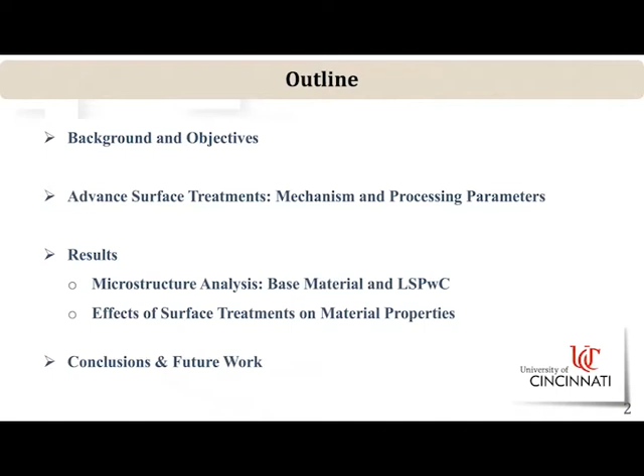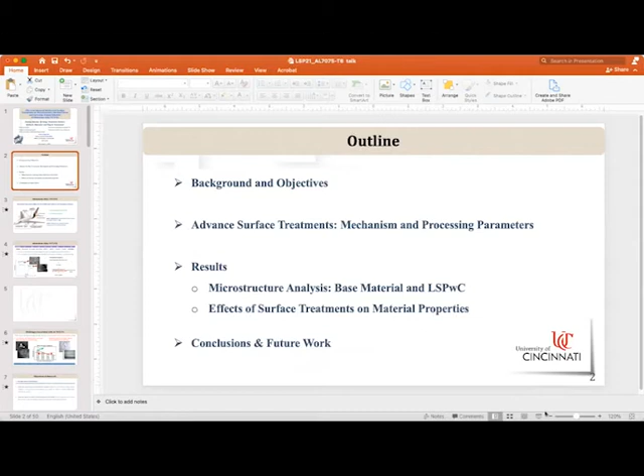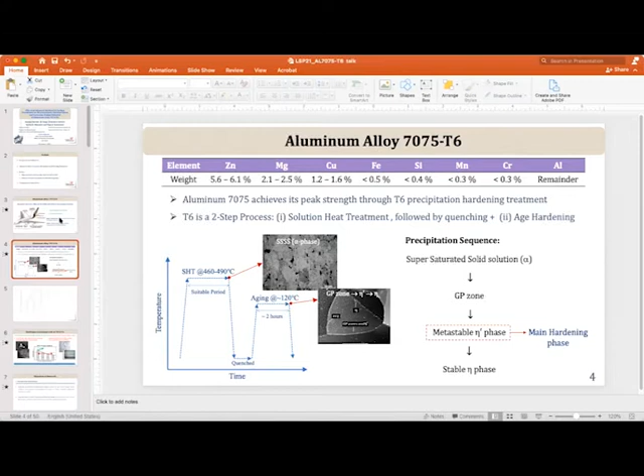Okay, so 7075-T6 is a high-strength aluminum alloy, right? And this is the basic composition of the alloy. VJ, we're only seeing a sliver of your presentation. I think if you just leave it in edit mode and present it, that'll work fine for now. Oh, there it is. Okay.

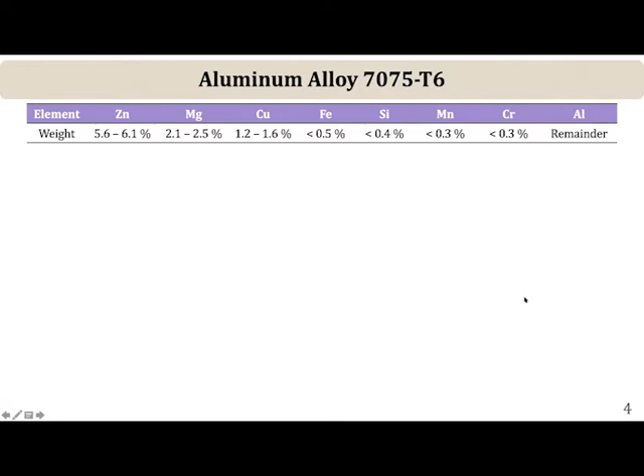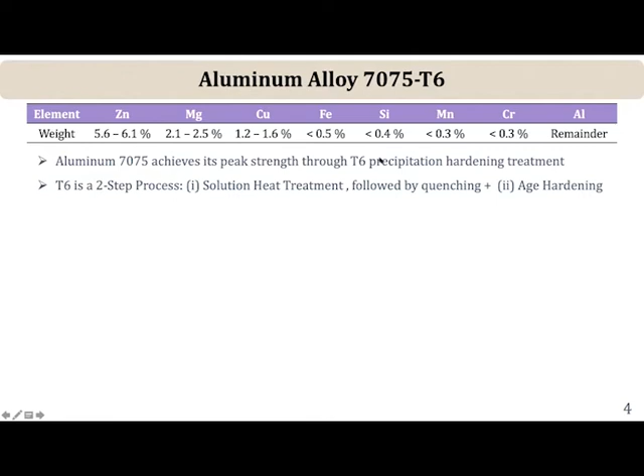Okay, so basically it's an aluminum zinc magnesium alloy with about 5.5 to 6% zinc, 2% or so magnesium and copper. These are the main strengthening agents or alloying elements. And it achieves its high strength through the T6 treatment, which is a peak-aged condition. So basically the alloy is solution treated, typically around 460 to 490 degrees, it's quenched and then aged at 120 degrees C.

So basically this alloy derives its strength through precipitation. The precipitation proceeds in steps. It involves initially a supersaturated solid solution. You get GP zones, which are almost pure zinc. That's followed by formation of eta prime, which is a metastable precipitate, and then the equilibrium stable eta phase. The eta prime is the primary strengthening precipitate.

However, most aluminum alloys, apart from these very fine precipitates that you get, also have these large intermetallics, typically copper-rich aluminum, copper iron-rich particles. And those are a huge problem in aluminum alloys, not just from the standpoint of limiting fatigue life, but also in terms of corrosion resistance, because there is galvanic coupling relative to the aluminum matrix. So these tend to be somewhat nobler, and the areas around these precipitates typically tend to get attacked.

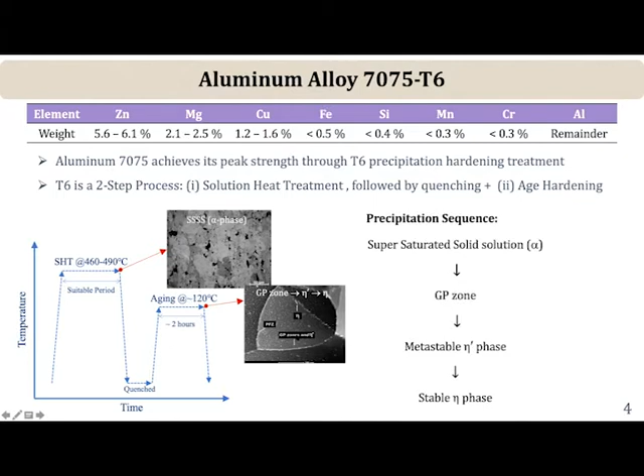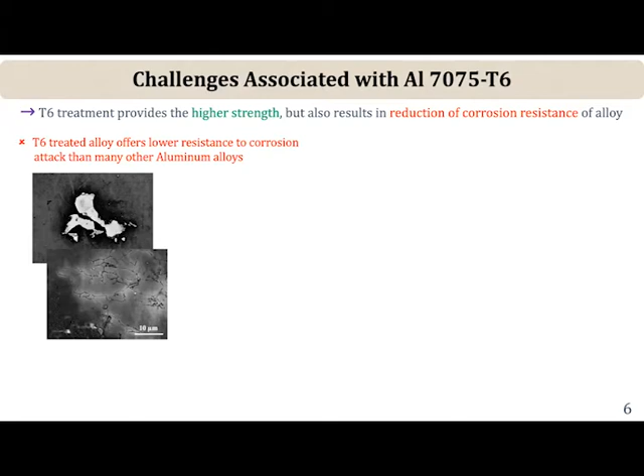And that's where pitting typically initiates. And then once the pit forms, it's a local area where fatigue cracks can initiate. So this SEM micrograph here shows a typical microstructure. But as I mentioned, one of the main challenges is that the T6 treatment, although it provides higher strength because it's a peak age condition, it also reduces the corrosion resistance appreciably, compared with many other aluminum alloys.

In fact, corrosion and stress corrosion cracking and exfoliation are problems in aluminum alloys. One of the earliest speakers talked about marine aluminum alloys, where there's a similar problem in terms of precipitation of the beta phase along grain boundaries, which leads to depletion of magnesium around the grain boundaries and gives localized cracking and exfoliation, where entire grains fall off. So this is a problem not just in the 7000 series, but in a number of aluminum alloys as well.

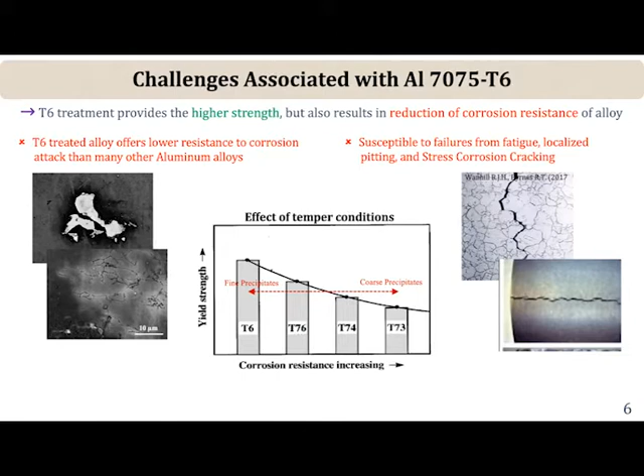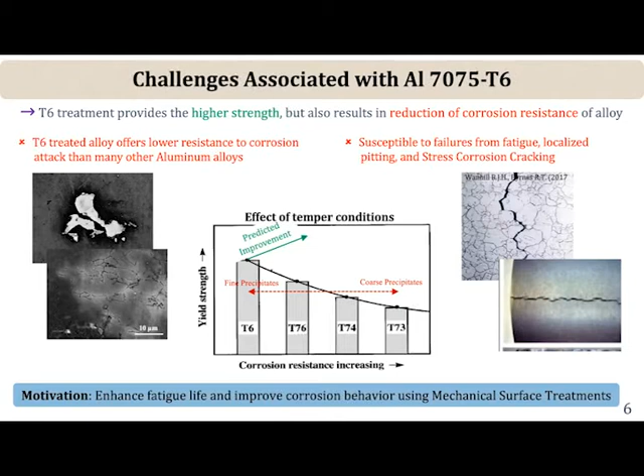So the question is, if I want to use the alloy in a high strength condition, is there a way to simultaneously achieve protection against corrosion and stress corrosion cracking? So the goal here really is to look at what impact mechanical surface treatments could have on improving the corrosion and stress corrosion cracking resistance of high strength aluminum alloys. So basically, Anurag did this in 2 stages.

He first looked into detail at how laser peening and the other technique of ultrasonic nanocrystal surface modification, what kind of microstructural changes they bring about, and in turn what impact that has on properties, and whether one can achieve some kind of a mechanistic understanding of not just the impact of compressive residual stresses, but more importantly, as the earlier speaker alluded to, these surface treatments are not just about introducing compressive residual stresses, because there are significant near surface microstructural changes and gradient microstructures produced, which are less understood and also have a huge impact on the fatigue life.

And this is something that, as the previous speaker mentioned, there needs to be a program to really look at how we can take credit for that, especially in life prediction kind of modeling. But anyway, that's another subject altogether.

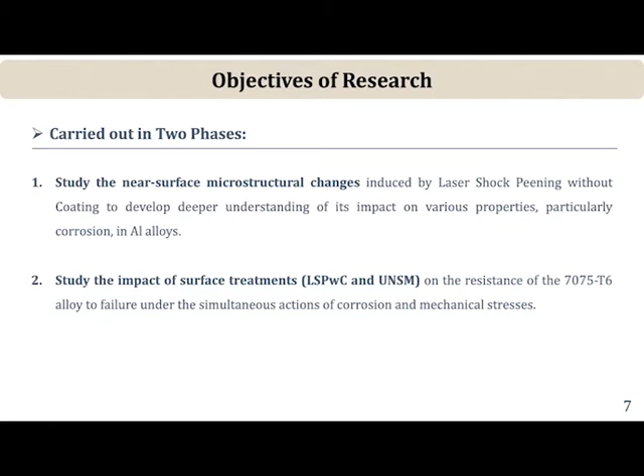So one is to understand the microstructural changes, and the second is to look at what impact these treatments have on the corrosion behavior and on the mechanical properties.

So basically, the materials were supplied by Airbus. These were thick plates, and as you know, the properties of these plates can be quite anisotropic. You have an elongated or partially recrystallized kind of grain structure, so it depends very much on whether the short transverse direction, typically the weakest direction and most prone to fatigue cracking.

So we have to take care when you do these sort of treatments and when you do the testing, that you test the material under conditions which are going to be the worst in terms of loading relative to the microstructural features. So two techniques.

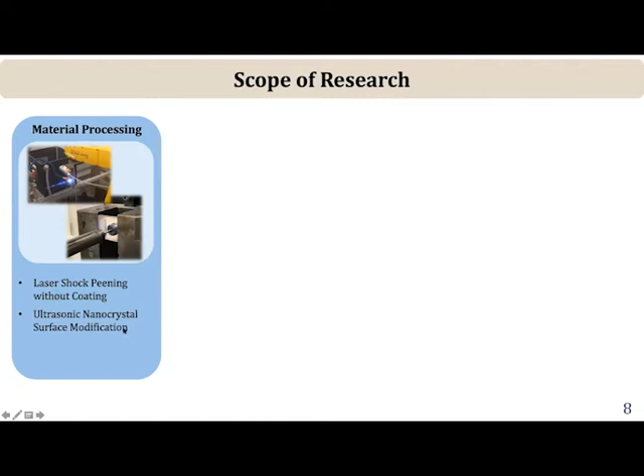One is laser shock peening without coating. Although Anurag has also looked at the effect of LSP with the ablative tape and then compared it with without coating. And then the UNSM, ultrasonic nanocrystal surface modification technique.

Characterization of microstructure and residual stress using a host of techniques, typically scanning electron microscopy, energy dispersive spectroscopy, electron backscatter diffraction. And then also to look at the near surface microstructural changes, you use focused ion beam methods to extract thin foils from the near surface regions, so that we can understand those features, microstructural changes, in much more detail. Residual stresses measured by X-ray diffraction, characterizing surface roughness, grain morphology, and then fractography as well.

The mechanical property tests, both using hardness, nano indentation tests, principally 3-point bend tests for the mechanical property, as well as the corrosion fatigue test, fatigue as well as corrosion fatigue.

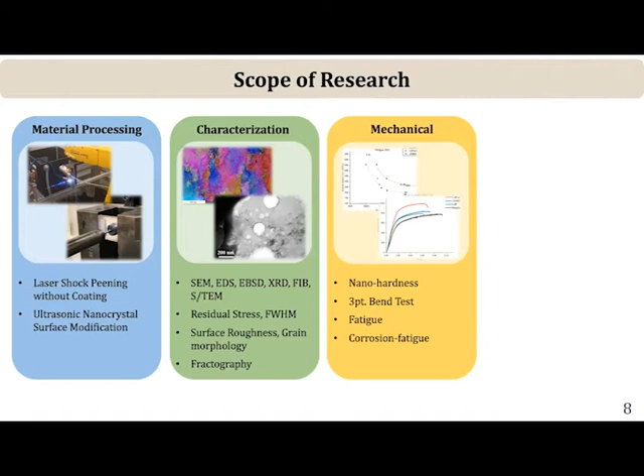And because, when you're dealing with surface treated materials, 3-point bend or 4-point bend tests are generally more suitable, because you're able to orient the sample in such a way that you can really test the effect of the mechanical surface treatments.

And then corrosion behavior is principally studied using electrochemical impedance spectroscopy, as well as potentiodynamic cyclic polarization.

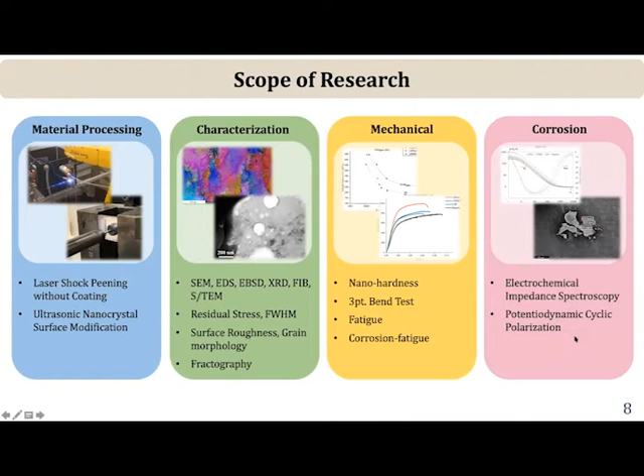Okay, so we have, in the Ohio Center for Laser Shock Processing in my former institution, UC, two systems. One is a Generation 4 system. These were built by Continuum, and they were kind of custom built, patterned along the systems that GE Aviation has in Cincinnati. And in fact, we got a lot of help in building these systems from GE. So this is a 7-joule system in each leg.

It's infrared, and at the frequency of 10 hertz, and the pulse width is around 20 nanoseconds or so. And with a robot system and a cell for the water and all the safety measures and so on.

Besides that, we also had a continuum DLS system, a 3-joule system in the infrared mode, and also the green. So this also had a green laser, so you can actually do some underwater peening. We've done those kinds of studies as well, and actually that has a very remarkable effect, especially when you do the laser peening without using any ablative tape.

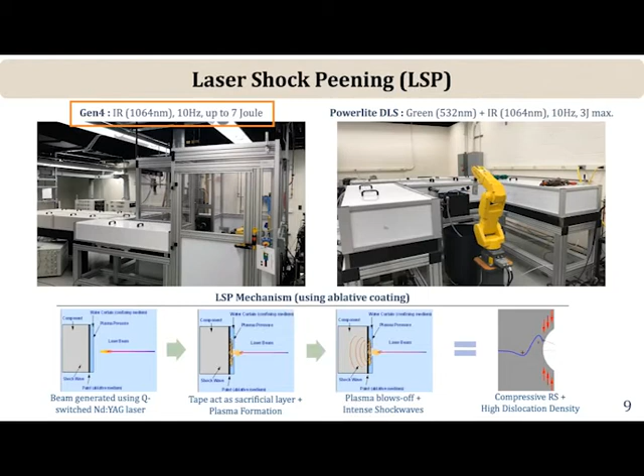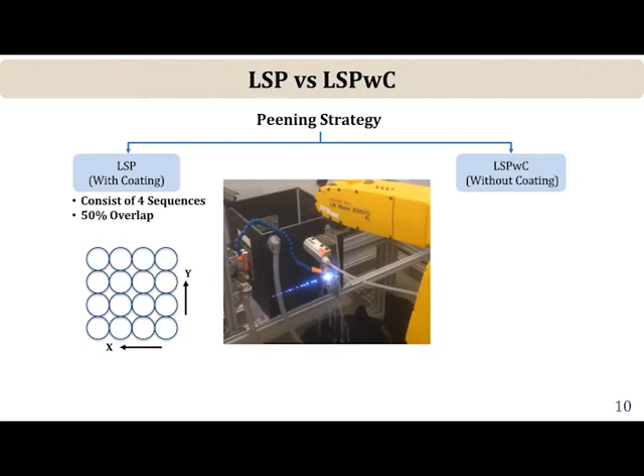So comparing the two, when you do this without a coating - Anurag has done this with and without the coating - so if to create a patch like this you have to use 4 overlap sequences, sometimes many more, depending on the degree of overlap, each time we've got to change the tape, right? And this is the net effect that you get from laser peening with the tape.

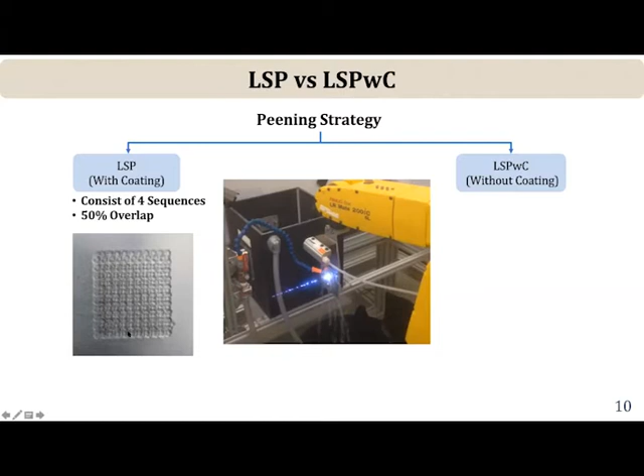When you do this without the coating, on the other hand - when you use the coating, you don't have any surface melting, it's a purely mechanical effect, and you get fairly high compressive residual stresses, and the degree of surface roughening is also low. But when you do this without a coating, basically no sequencing is required. But in the case of these aluminum alloys, you can see that the surface appearance is completely changed, right?

And as I mentioned, you can do this under flowing water or underwater, okay? And when you do this without a tape, you get surface melting and rapid solidification. The surface residual stresses can often be tensile, or slightly compressive, depending on how many spots, number of impacts you've put per unit area. But you can see that something has happened, where presumably you've got some kind of an aluminum oxide layer that has formed.

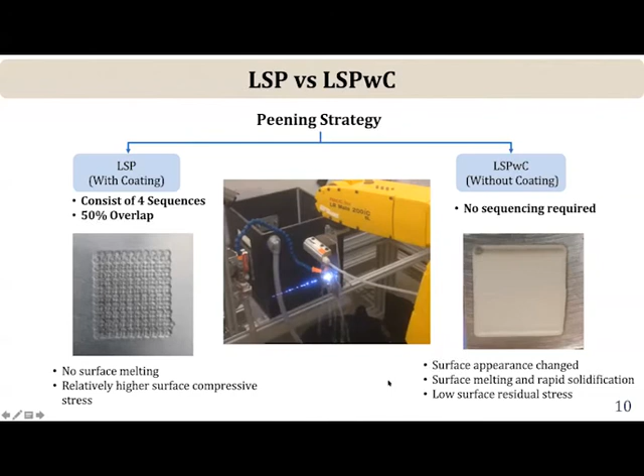So what Anurag did, with regard to this LSP without the coating, which was coined as LSPwC, following the original work of Yuji Sano, who's going to be speaking later, shows the methodology he used for doing this peening without the coating. But prior to selecting what kind of conditions to use for more detailed study, Anurag initially looked at the impact of pulse density - basically changing the degree of overlap and the number of hits per unit area - to set up some initial conditions for further study.

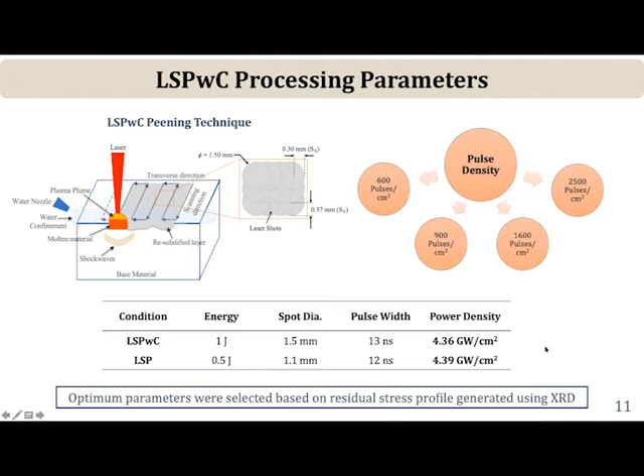So this shows the conditions. Energy is pretty low, the spot sizes are controlled here for these two. So the LSP here is with tape, LSPwC is without the coating, to get approximately the same kind of power density. These were arrived at based on measurements of the residual stress using X-ray diffraction. For this, we used the sine squared psi method with a proto-LXRD system, basically using a chromium tube.

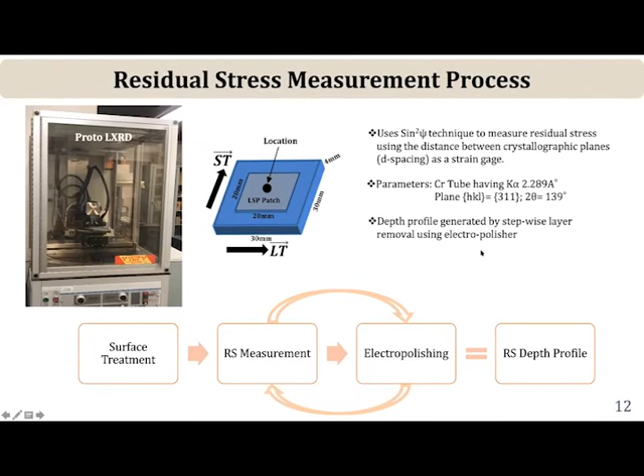The diffraction plane shown here is 311. To get the residual stresses to the depth, we use electropolishing, remove layers, do the measurement, and then account for the stress relaxation and stress gradient due to layer removal, which is taken into account in the software itself. This shows, essentially when you do the laser peening without coating, along two directions - the short transverse direction and along the LT direction, two orthogonal directions. You can see that the baseline material is slightly compressive on the surface, but relatively low residual stresses.

One important thing, as I mentioned, is initially Anurag looked at the impact of pulse density, and you see here the surface stress as a function of pulse density is shown. What he found was that at about 900 pulses per square centimeter, you get some optimal levels of compressive residual stresses in both directions. So essentially for subsequent studies, he chose this 900 pulses.

The important point to realize here is that this shows the residual stress versus depth as a function of distance, as well as variations in the pulse density.

In general, when you do this without a coating, the surface compression can actually in some cases be tensile. You can see here it is tensile in one direction. But just below the surface, there's a rapid increase in the compressive residual stress. Get about 10-20 microns below the surface, and you have fairly high magnitude of compressive residual stresses, to the tune of about -400 in one direction, about -300 in the other. The depth of compression also goes to about 1 millimeter or so.

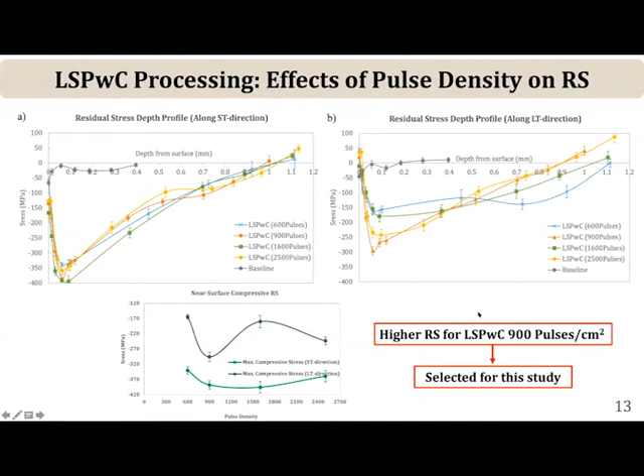Based on this study, he chose 900 pulses for processing all the remaining samples.

The other technique is basically ultrasonic nanocrystal surface modification. The difference is that this is really a technique for severe plastic deformation of the surface. It uses a tungsten carbide ball, and you impact the surface at very high frequency, on the order of 20,000 to about 40,000 times per second, with the tungsten carbide tool driven ultrasonically. Basically what happens is similar to shot peening and even low plasticity burnishing, I would say. It's really a variation of that technique.

The difference is in low plasticity burnishing, you keep the tool pressed and move it along the surface very slowly. Here, you not only have a static force, but also a dynamic force whose amplitude can be controlled. So the main variables in this process are the amplitude, meaning the depth to which you hit it, the feed rate at which the tool traverses, and the static load.

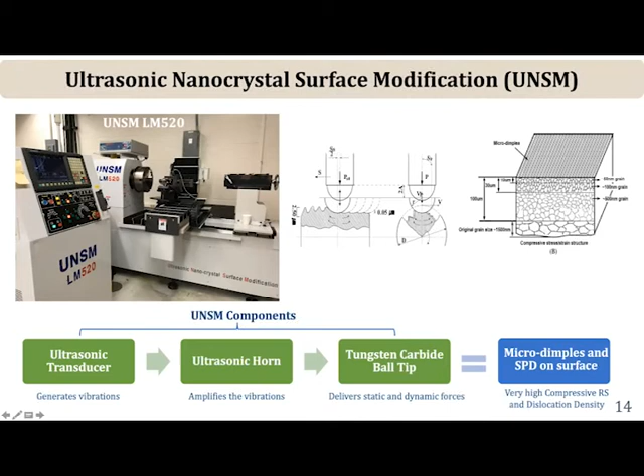So the machine itself is relatively simple. This is the one at UC. You can even do cylindrical parts. You place your sample or coupons here, and essentially what you do is hit it on the surface and create a patch. You can vary the speed at which you move the tool, vary the amplitude, as well as vary the pitch or the distance between the hits.

You can see he chose three different conditions for looking at the effect of UNSM. One is the static load, a constant load over and above the dynamic load. The amplitude, in terms of how much you're moving the tungsten carbide tool, the feed rate at which you move the tool, and the spacing interval between the hits. This gives you some idea about how many hits are there per square millimeter.

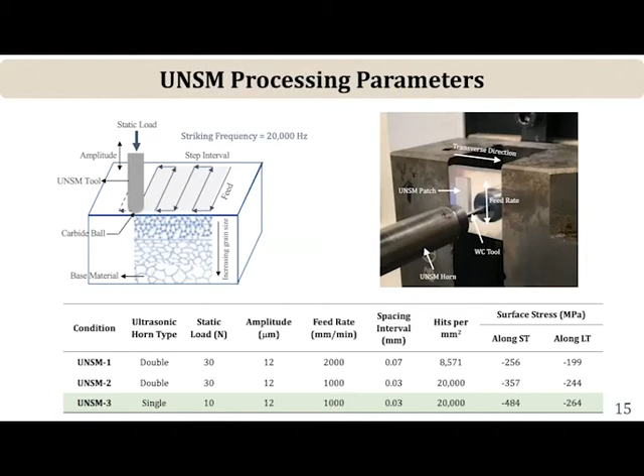And then the surface stress measurements are shown here. So one of the things with this technique is that just like in laser peening, wherever you're hitting, you're plastically deforming, and the surrounding material wants to constrain that deformation, so you get compressive residual stresses. But the other important thing is, since it's a severe surface plastic deformation technique, you get surface nanocrystallization. Essentially, the grains get broken up into subgrains or crystallites with high levels of misorientation and very high dislocation density, which also contributes to substantial hardening.

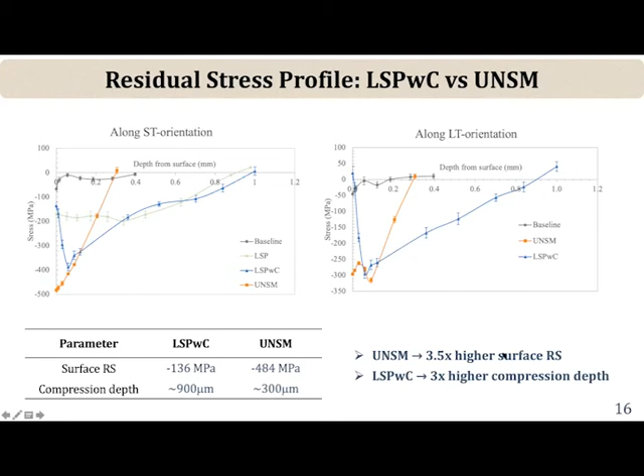Regardless, you can see that UNSM can lead to much higher surface compressive residual stresses, but the depth of compression is somewhat lower than the case of laser peening.

The other important quantity is that compressive residual stress is only one part of the problem. The other is the change in microstructure, the increase in dislocation density, and the formation of crystallites. Both LSP and UNSM can be regarded as ultra high strain rate deformation - it's plastic deformation. So the dislocation density is going to increase, and you're going to form subgrains and crystallites which are highly misoriented.

The consequence of having crystallites and high dislocation density is that you get broadening of the diffraction peaks. The extent of broadening can be used as a measure of the level of plastic strain at the surface, as well as a measure of crystallite size. So what you notice here is the full width half max of the diffraction peak as a function of depth.

What you see here is that in the case of UNSM, when you blow this up, the dislocation density is much higher compared with laser shock peening. The crystallite sizes are also much finer - you can get almost 20, 30, 40 nanometer size crystallites at the surface, and that gives you a much greater extent of broadening compared with the case of LSP.

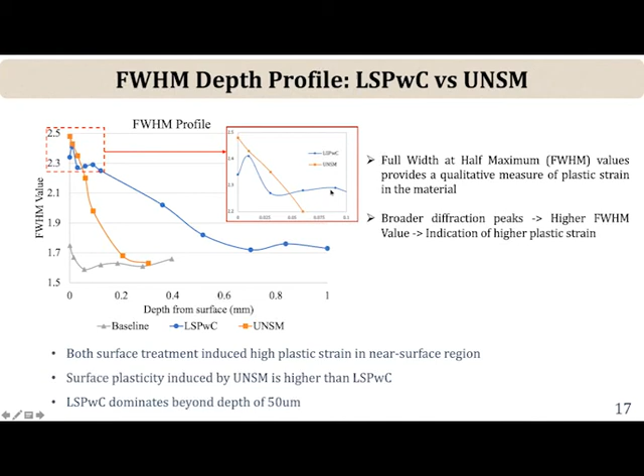Interestingly, even with LSP with coating, you do have a fair amount of broadening at the surface. At the surface it's a little lower, but the dislocation density just beneath the surface is actually quite high. Beyond about 50 microns or so, there's much more plastic strain with LSP compared with UNSM.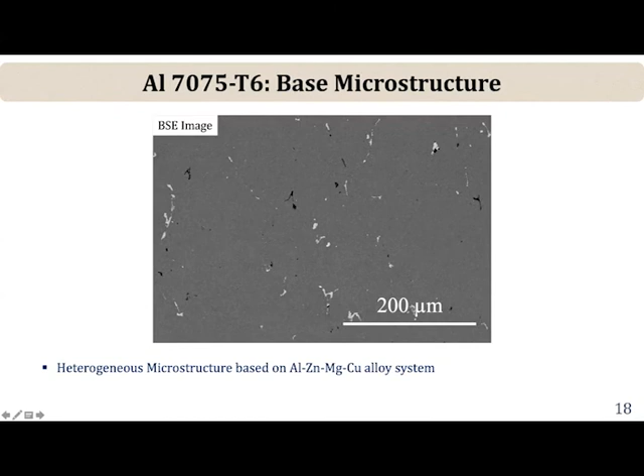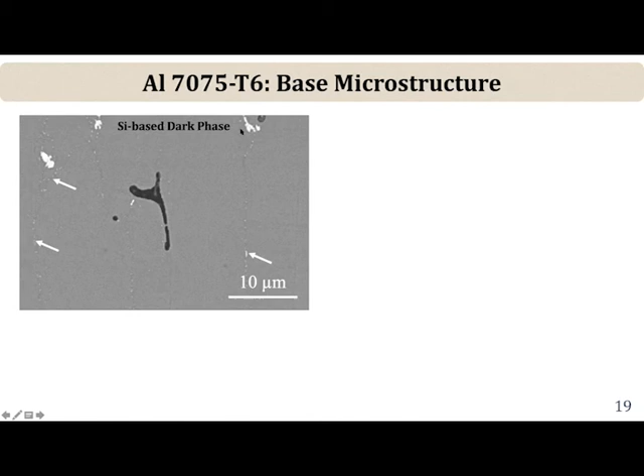Okay, so this is the base microstructure of the aluminum 7075-T6. Basically you see two kinds of intermetallic particles: bright looking particles and darker looking particles. The darker looking particles are essentially magnesium silicon or even can contain higher levels of oxygen. These brighter particles here are aluminum iron copper. You also have some brighter particles along subgrain boundaries and along grain boundaries.

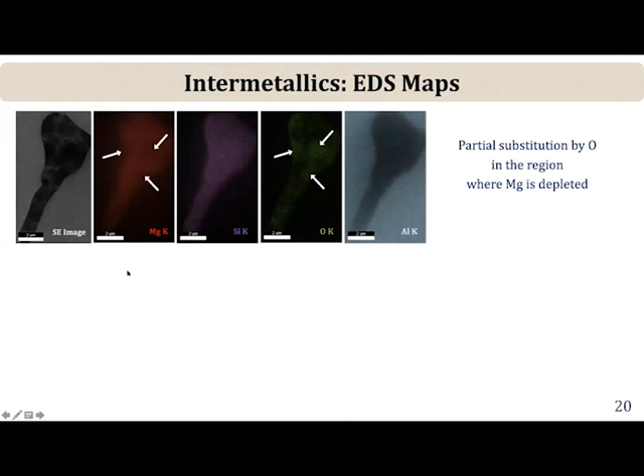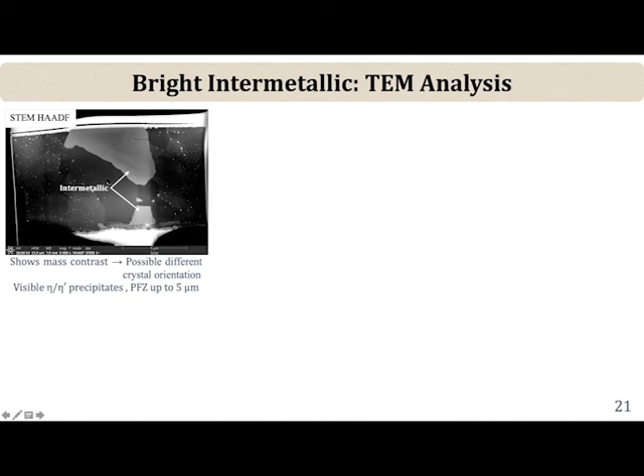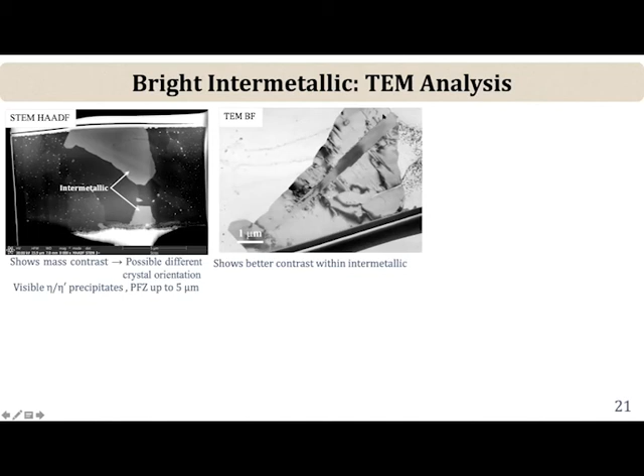When you do these EDS maps, you can see that some of these particles are basically magnesium silicides or even magnesium silicate. We fibbed out an area where we could fib out a particle itself - this shows a fib foil. You can see the bright MgZn2 or eta prime precipitates, and this is an area where there's been some depletion. Some of these coarser intermetallics are actually aluminum iron silicon compound, which is a well-known compound that has a BCC structure with a big lattice parameter.

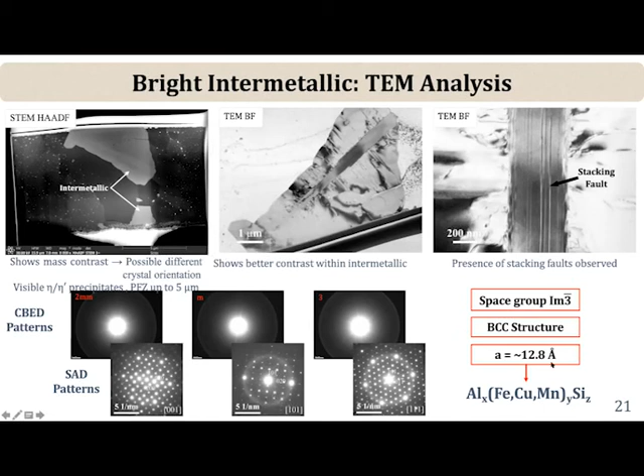One of the things is that the microstructure of 7075 is fairly complex. These are STEM EDS maps showing various kinds of precipitates. The fine precipitates are eta prime. Some of these coarser precipitates are eta. Some others are rich in copper and chromium. Some of these coarser precipitates are actually different kinds of compounds, but the fine ones here are MgZn2.

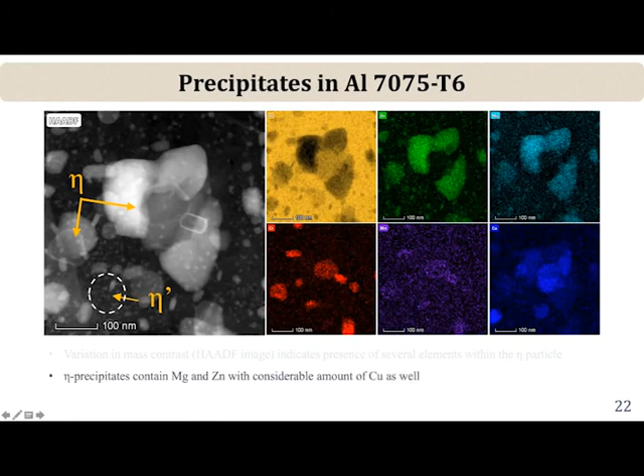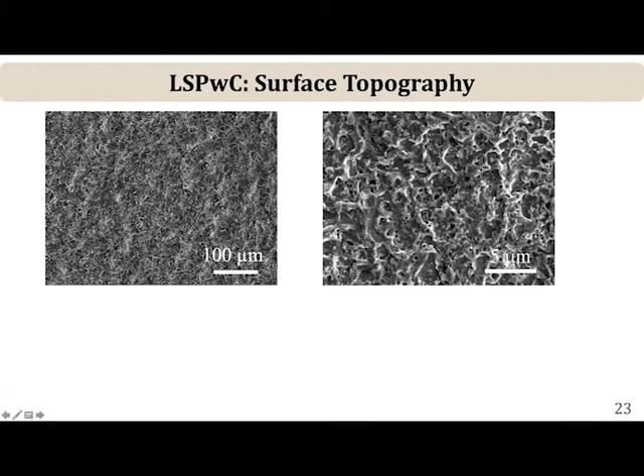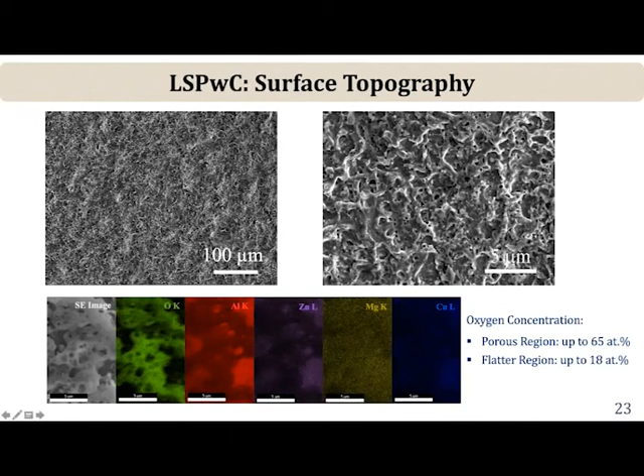So when you do this laser shock peening without coating, you get a fairly rough surface, and you can see here what looks like even some particles and some blowholes and so on. But when you measure the oxygen in some of these porous regions, the oxygen content on the surface is fairly high, on the order of about 65 atomic percent in some cases.

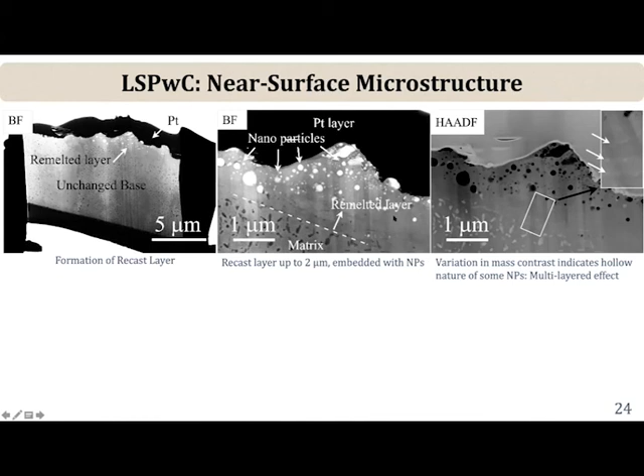But you have a remelted and recast layer, and in this layer you see some very interesting features. You have what look like nanoparticles. These appear relatively dark in this high angle annular dark field image, suggesting that they are enriched in oxygen—so these are oxygen-rich aluminum nanoparticles. Some of them could also be hollow, simply voids or bubbles that have collapsed clusters. But what we could show is that these are principally rich in aluminum and oxygen.

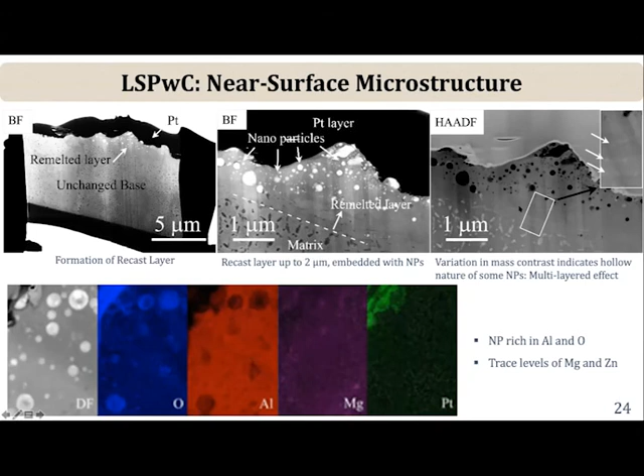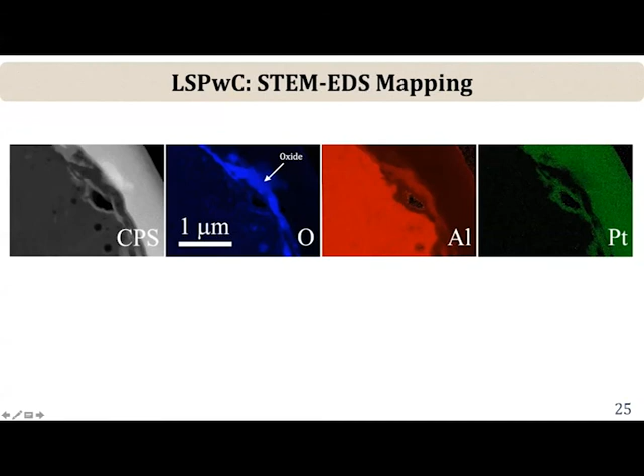So you have a remelted region from the repeated peening. Now, the other important feature that one sees, apart from this recast layer, which is now free of these big precipitates, is there's a very thin layer of aluminum oxide on the surface. So two important things: a clearly distinguishable aluminum oxide layer, which varies in thickness, and also these aluminum nanoparticles.

The previous set of images were done in a scanning electron microscope. These images here are from a scanning transmission electron microscope at 200,000 volts, much higher resolution, so you notice features now which are very similar except in much more detail.

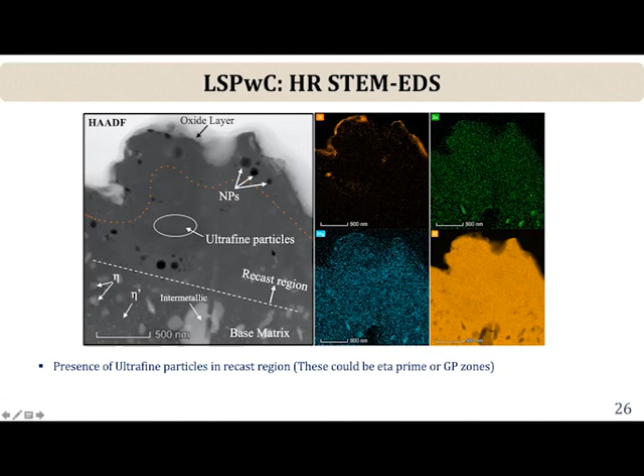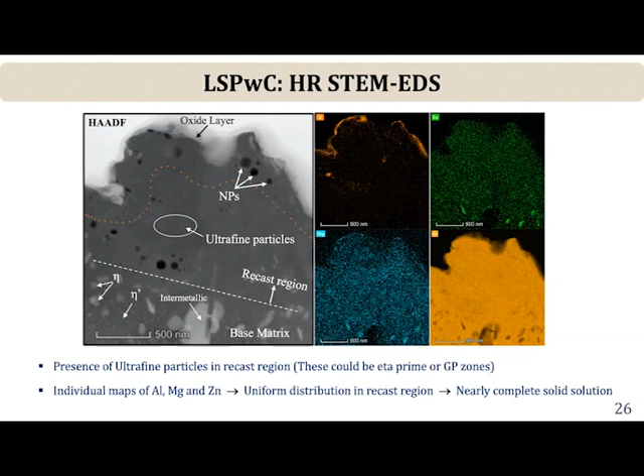You have some very ultra fine precipitates and you have these nanoparticles on the surface. These could be eta prime or they could be GP zones, which are known to form even at room temperature. You can have an aluminum 7075 alloy sitting at room temperature and get precipitation at room temperature, so some of these fine particles could have been produced that way.

But the important point here is that the diffraction evidence—these are micro diffraction patterns taken from individual particles—shows that these are aluminum enriched in oxygen.

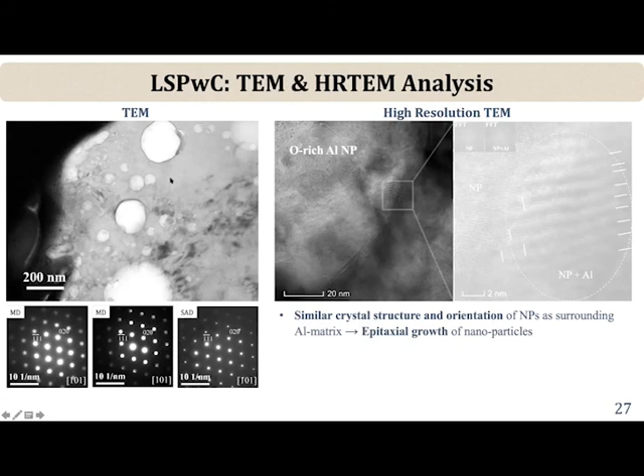But the interesting thing is there is a one-to-one correspondence of these particles with the surrounding matrix. So even though this plume has formed and then collapsed, the aluminum particles essentially almost epitaxially solidify with the surrounding matrix, which is very interesting. A little bit of that mismatch is taken up by these misfit dislocations at the interface.

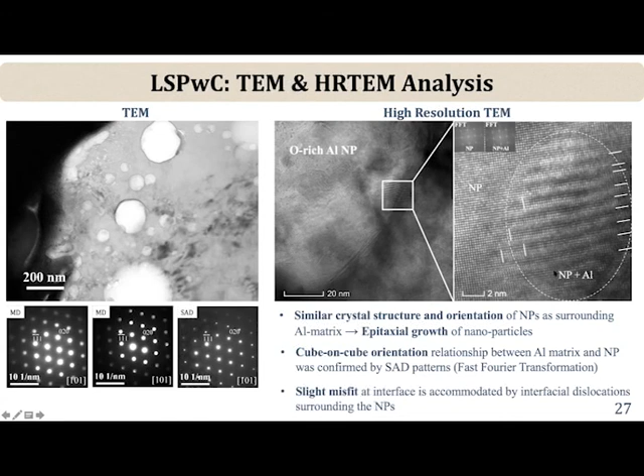This is a very interesting thing that we have observed, and this work was published in Scripta Materialia, and we have submitted another paper to Materialia. So this gives you some idea about how we think this near surface microstructure is forming, but I don't have a whole lot of time.

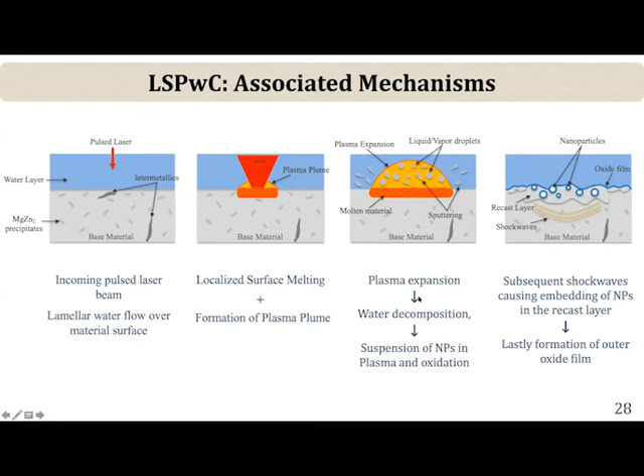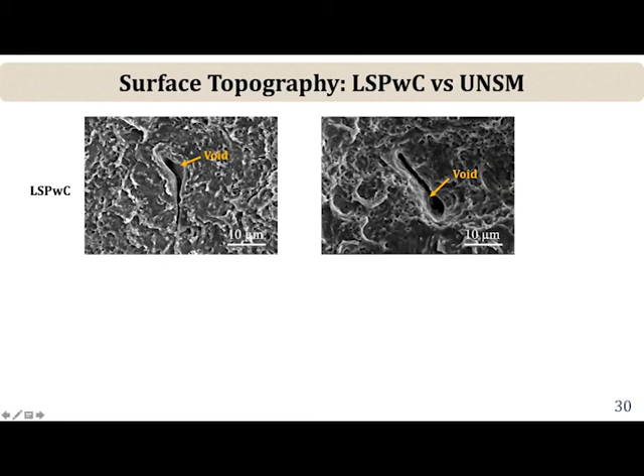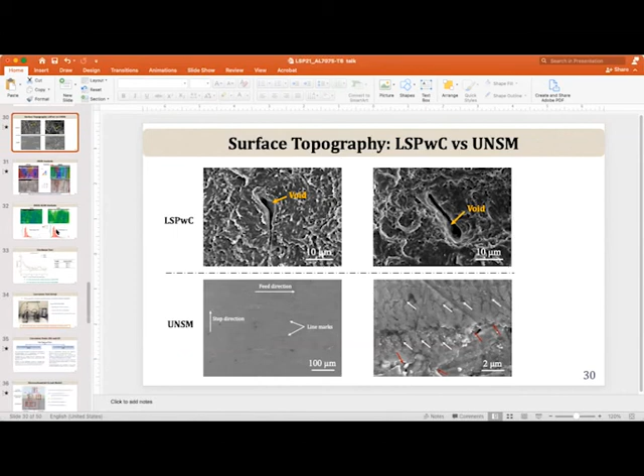Yes, we're down to 2 minutes. So let me thank you and just show you some effects on properties. Let's go through this quickly—VJ, we've got 2 minutes left, so if you could summarize quickly, that'd be great. Yeah, I'm doing that. Sorry about how long it took, but let me show you just some quick results of the corrosion.

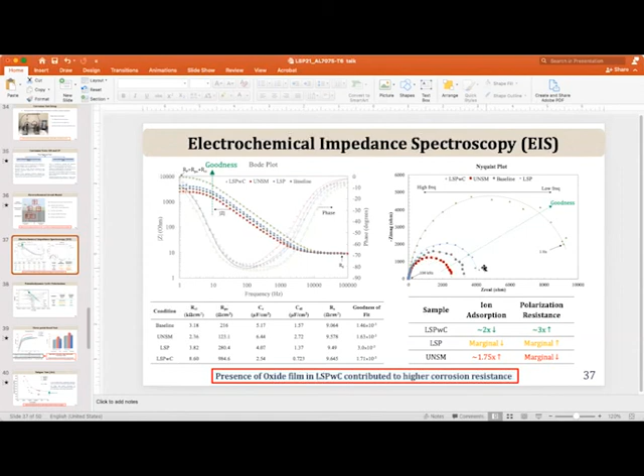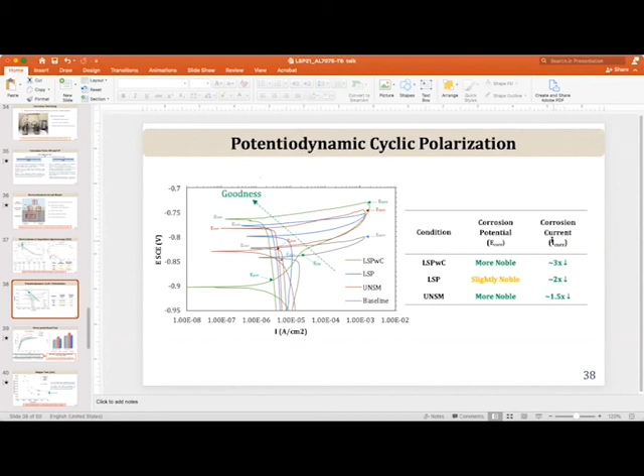In terms of the corrosion behavior, we used EIS techniques, and you can see that with LSP without coating, the polarization resistance is much, much higher compared with even UNSM or any of the other cases—a marked improvement in the corrosion resistance. The other important point is that with cyclic polarization tests, there's a big increase in the corrosion potential and lowering of the corrosion current. So when you do LSP without a coating, you get a big improvement in the corrosion resistance.

The other interesting feature is that if you look at tensile properties—these are bend properties—the LSP without coating gives you the highest strength compared with either UNSM or LSP with tape.

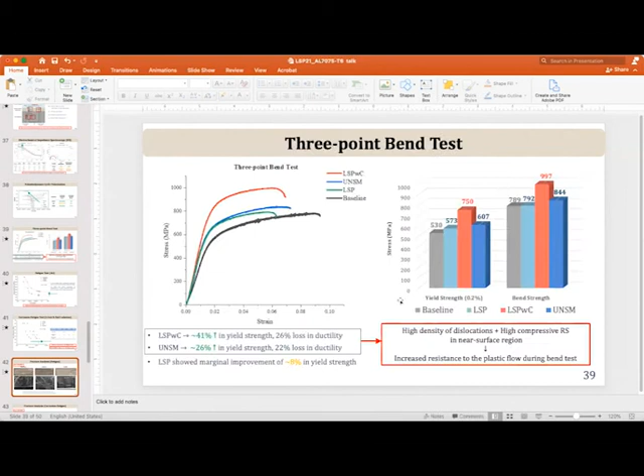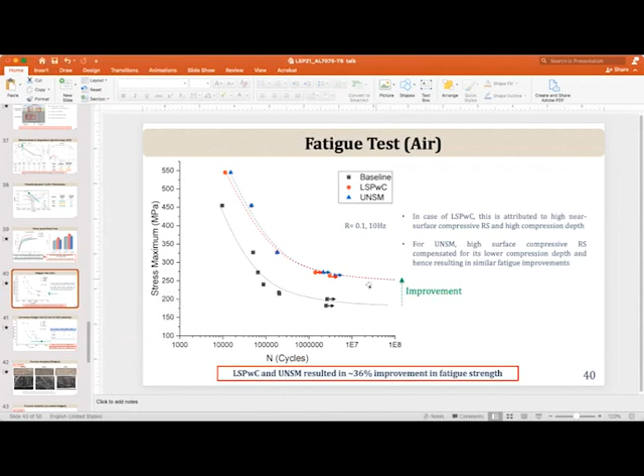Lastly, I will show you the results of fatigue. This shows what happens in air—this is baseline material. Both LSPWC and UNSM are comparable in air as far as improvement in the fatigue life and endurance limit is concerned. But when you get to corrosion fatigue, you can see that LSPWC, without coating, gives you a huge improvement, much greater improvement in the corrosion resistance. I believe this is associated with the presence of that thin aluminum oxide on the surface.

And we've also done some fractography, which gives you a little bit more insight into this.